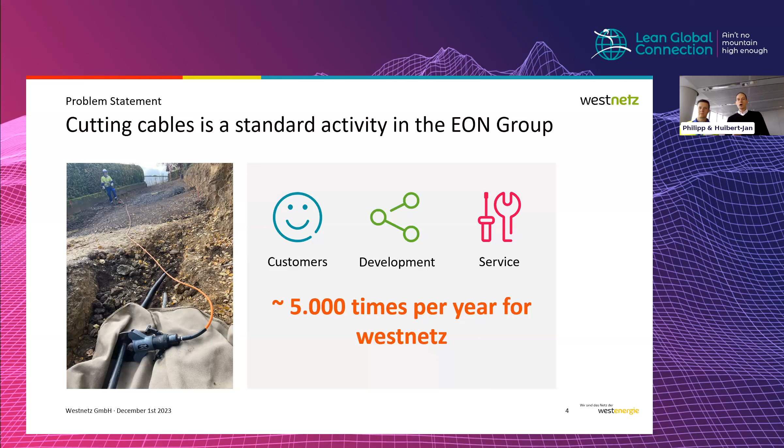So what could possibly go wrong in a situation like this? Well, first of all, if you do this wire cutting, of course, the current needs to be off of the cable. And unfortunately, what we have found is that cutting these wires and taking the cable off the grid goes wrong quite often in our case. So if you look at the 2021-2022 numbers, we had within Westnetz 13 near misses and even 3 larger injuries.

Now, how important is that? So what happens if you cut a cable which is still connected to the grid? We have a small video around that. And so please keep in mind, this is a low voltage connection that you will see in the video. So that's the same type of connection as you have at home. And let's see what happens if you cut that with the same device as you saw in the previous picture, where there is still current on it. Yeah.

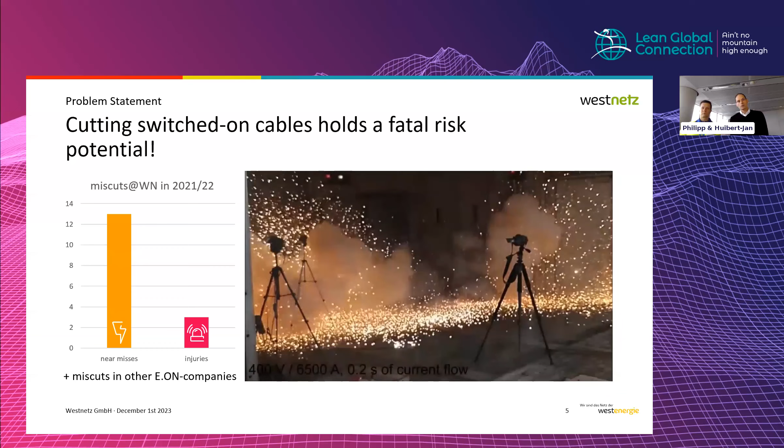Thank you. So I think you can see the massive impact of that. So this is one of our testing laboratories that we have for ourselves. There is a huge explosion. And so to explain it, so-called magma is being spread around in the environment. And the temperature is even close to 5,000 degrees Celsius sometimes. So you can see the huge impact when something happens like that.

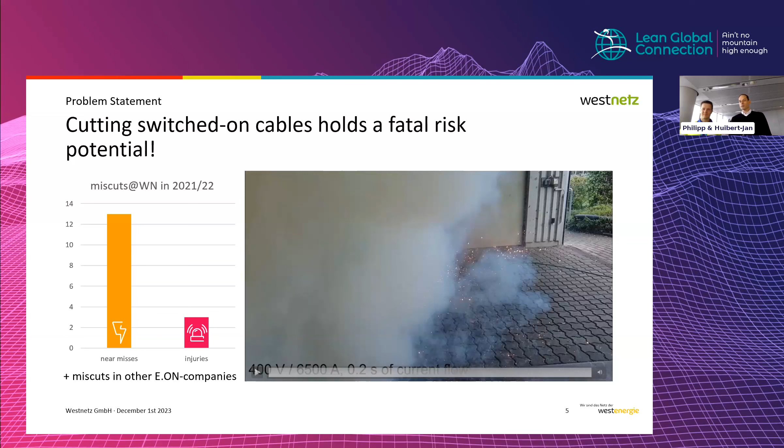So one last remark around that. This cannot happen at home for you, because there you have your own switches and your gear, so don't be afraid. But it is an actual reality for our workers in the field on a day-to-day basis. Yeah. How did we tackle this problem?

Yes. So we tackle this problem since you must imagine that sometimes the workers also have the chance to cut these cables by hand. And if they cut it by hand, it means that they are very, very close to this possible danger. That's why we have got those injuries. So we tackle the problem. And since we are good Germans, of course, we did it in a very structured way. So it's the regular PDCA circle.

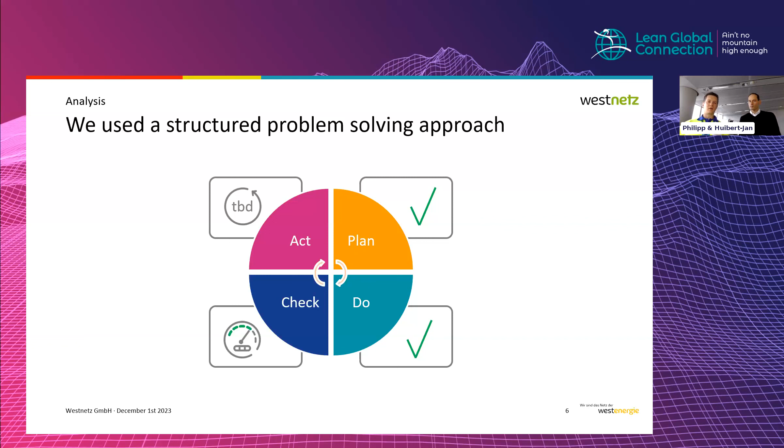At first, we discovered that there is a problem and we described it, analyzed it. Finally, we figured out some measures to avoid those injuries. And currently, we are implementing the solutions and check if it's sufficient or if we also need to react on further incidents. So since we had 16 incidents, we also have got 16 times the chance to analyze those problems. So what you can see on the left-hand side is the way that we do it.

We do it in a root cause analysis. So we see a symptom which grows up from the ground, and the symptom is a miscut. So what we do is now dig deeper and deeper until we figure out the root causes. And we have done this by talking to the people that suffered from those miscuts. And when I say that we talk to blue-collar employees, it does not mean that we go there and argue, but it means that we talk to them in a very fair way with the aim to learn from those mistakes in order to avoid them in the future.

Secondly, of course, we have got very nice PowerPoint slides that describe everything well, how it should be. But finally, reality might differ from that. So we also went outside to the construction sites and had a close look at the process itself and how cables are being cut. Finally, 16 incidents means 16 times the chance to analyze the data that we have got.

So what we have figured out, for instance, is that all injuries took place in the low voltage grid. Why? Because in medium voltage, there is a huge respect. Something really severe might happen, but low voltage, come on, it's like the voltage at home. You can maybe do it by hand. As we have seen, it can also become critical.

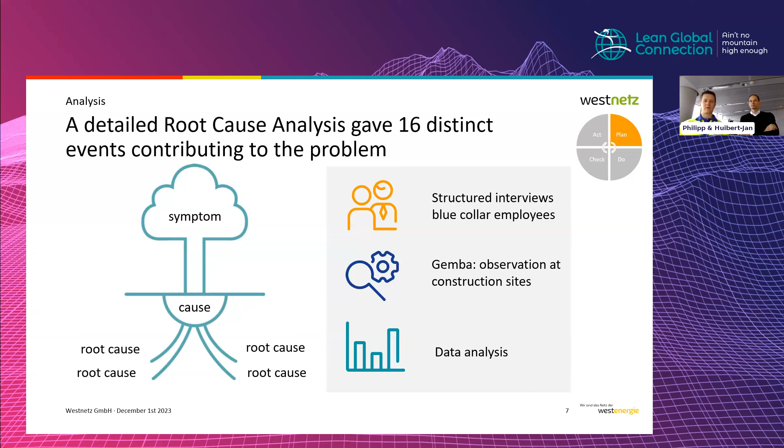So what I would like to point out at very first, and this is necessary to understand: our workers were always 100% sure to cut the right cable. None of us gets up in the morning saying, come on, let's have an incident today. So that's the very first part. Nevertheless, we have got those incidents. And we have figured out 3 main reasons for this.

So the very first necessary precondition for a miscut is that we mix up the cables. So for some reasons, workers do not work on the right cable. Maybe documentation isn't good, or the identification process failed, or we were interrupted in doing our job by somebody else.

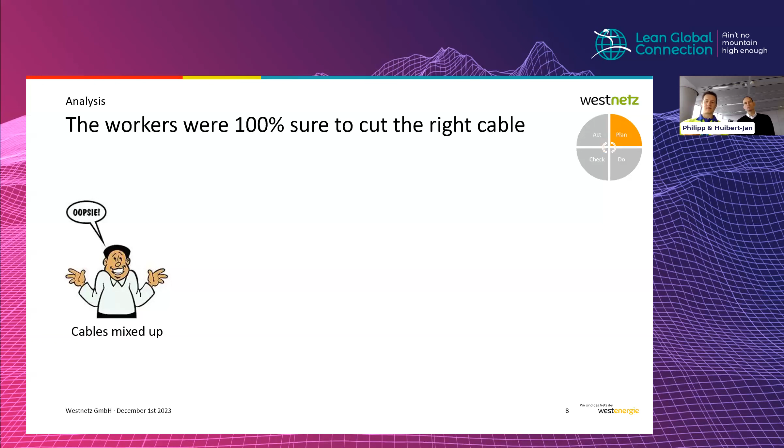Secondly, our workers stated that sometimes the instructions are too complicated. So sentences are too long, too much text, too complicated written. Sorry, we don't get it. So by these two preconditions, we have got a miscut, and danger arises if we use the wrong tools.

So as I've said, it's also possible to use hand-driven scissors, and it's of course a little bit simpler to use those compared to our old cutting tools that we have got. So our old cutting tools were way too heavy. It weighs like 20 to 25 kilograms. It's being transported in a large box, and it's not possible to always carry it with us on our buses.

So if we need to cut a cable, we have to return to the station, get the device, and return to the construction site to finally cut the cable. So it's quite a complicated process for our colleagues.

So to explain that, you had the heavy device. Exactly. And they could also do it with a smaller handheld device. Exactly. And which was kind of the quick fix, basically, what people could use in the field. Yes. Sometimes necessary, in this case, unfortunately.

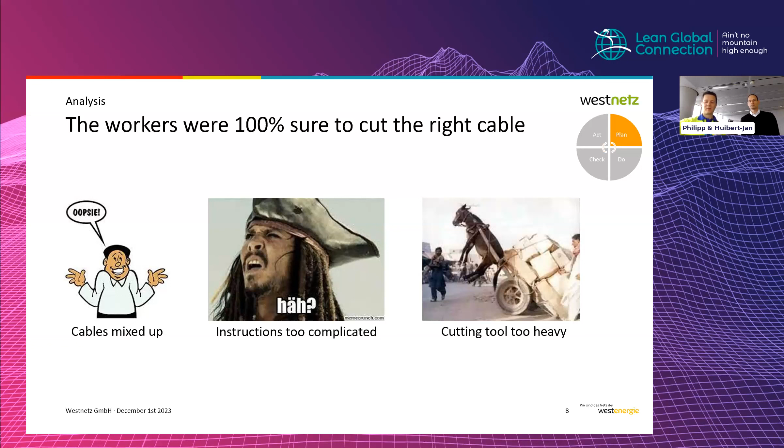So, since it's such a multi-level problem, we decided to tackle these problems also on each level according to the TOP principle. TOP principle means that we developed technical, organizational, and personal solutions in order to avoid miscuts.

So the very first technical solution is that we screened the market to find a new cutting tool. And today I brought a cutting tool, which you can see here. So you can maybe check the size of it. I can hold it easily with two hands. It's quite smaller. It's being run by a battery package.

It's only possible to run it from distance, so you cannot touch the button like a screwdriver and then the scissors run. No, we have got a separate remote control that runs the device. And together with the manufacturer, we have added certain safety measures. So finally, we have got a fully customized device for Westnetz.

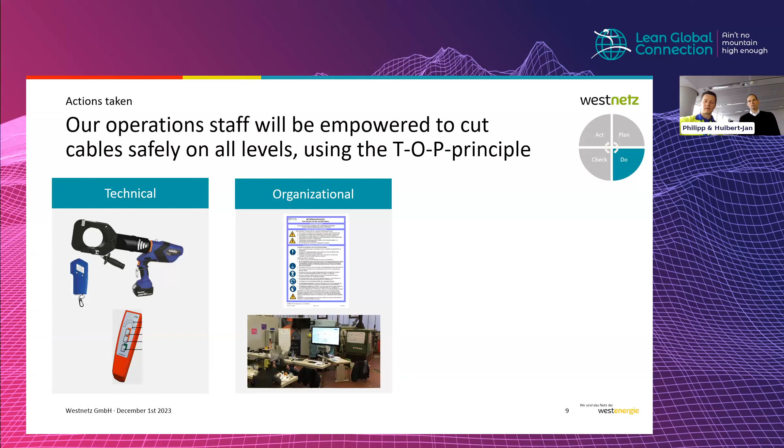Last and certainly not least, we still continue to sensitize on the danger of miscuts. So 2 weeks ago, we launched a video which shows the danger of miscuts, and you have just seen a small piece of it.

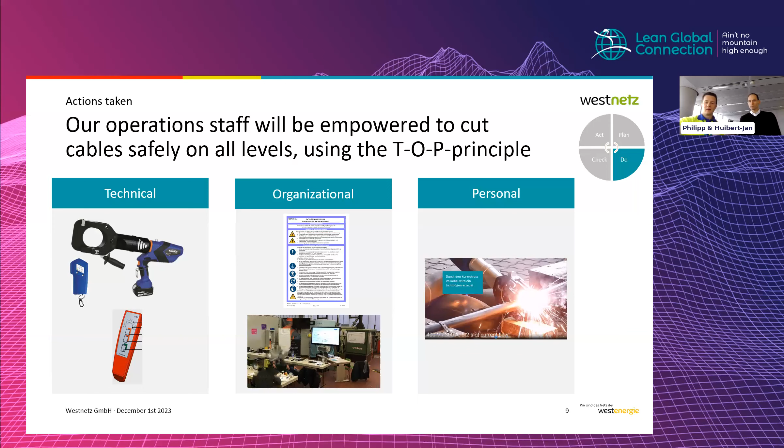Of course, all this solution is not a brilliant idea of mine. It's a solution of many, many people and colleagues in our company. So the operations staff tested the new tools and gave us important feedback for the development. I personally do not know what the exact needs of blue-collar workers are, so they have to tell.

Secondly, the instructions were revised with experts from service teams, from special departments, from HSE. And of course, also management and works council were included in the solution process, as finally, we also need some money. And we are quite happy that our professional association supports the development of our new cutting tool. So it's also some kind of legalized process.

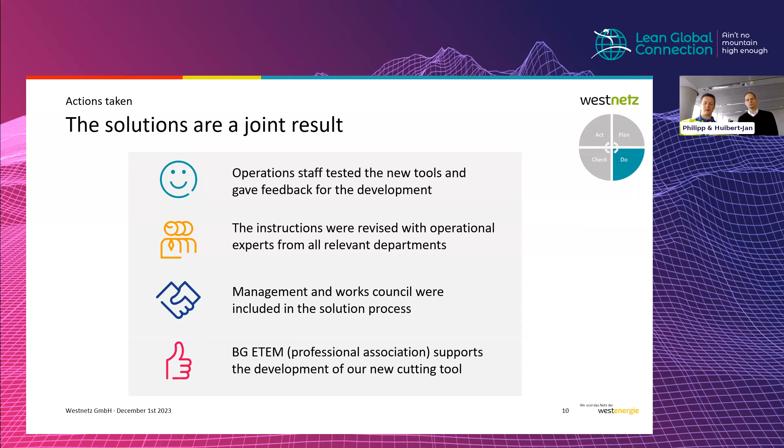Yes, finally, all our measures have been rolled out this year. So we incorporated the instructions. By now we rolled out all tools that we've developed. And we are looking forward to close the training of our staff. By now, we do evaluate our measures. We figured out some smaller parts where we can still improve, and those are measures that we're going to implement by next year.

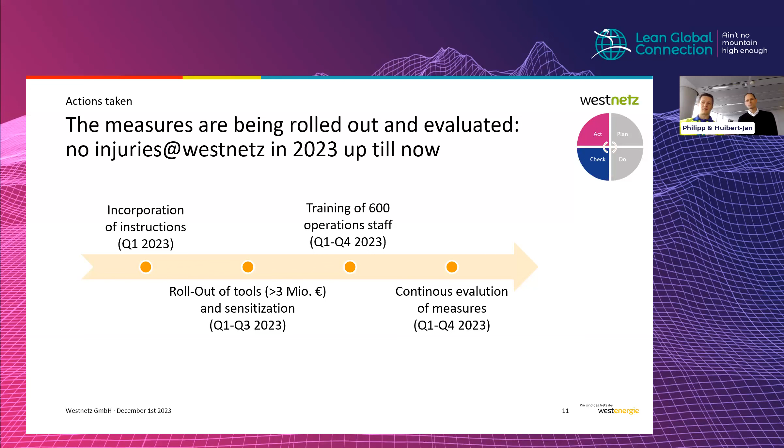Yes. And we're happy to say that we have much less incidents now. True. Yeah, so maybe you can give the latest numbers. We have got like 10 incidents, but no injury.

Super, super. Yeah, so what was the overall effect on the whole of the company? So first of all, very important is the employee engagement. So everybody in the company, also the frontline staff, feels that we care about them basically. And so we want to offer a safe working environment for everybody in the company. And we place huge emphasis on this.

So it gives a better working culture, a safe working culture, and also the employees see that the upper management is really involved in this whole initiative. So that also increases the motivation and the acceptance of all the solutions that we put forward.

Of course, the next one is that we are going down on the curve. So we have an increase in development of our HSE culture. So we are going towards now level 3 and level 4 in the different risks that we have.

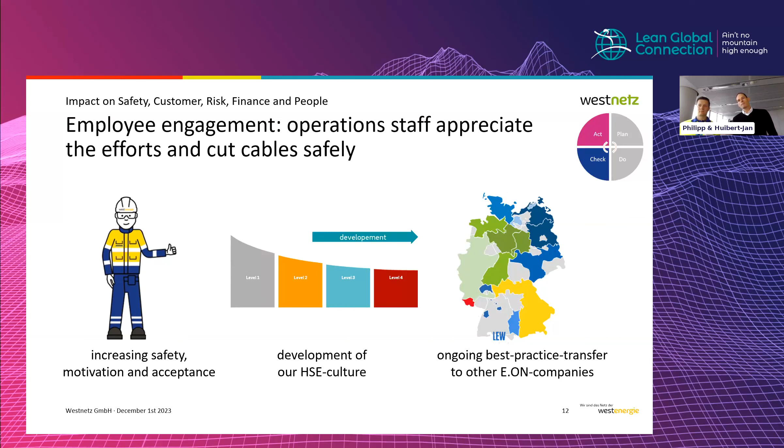And the other thing is that, so I showed you the map at the beginning of the presentation. So all the cases that we show and the solutions that we have are specifically for Westnetz. We're now replicating that solution across the whole of Germany and all the other 8 grid operating companies that we have, and there is a huge interest in there.

So if you think about Westnetz has 5,000 cuts on a yearly basis, if you multiply that, let's say by 10 or 12 for the whole of Germany, we're talking about 50,000 cuts. And think about the risk of injuries and miscuts that could happen over there, and that could really have a huge impact on our employees and even society. Yeah.

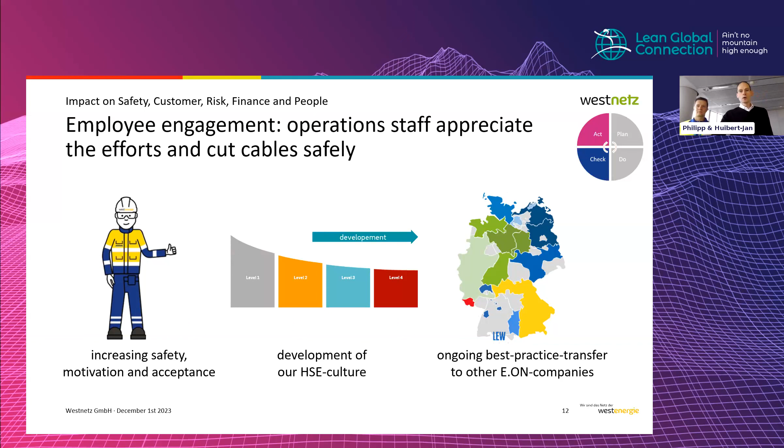Good. So finally, a call for action from our side. So let's cut our cable safely, I would say. So this is the end situation that we now have after implementing everything. We have a trained employee that knows what to do, of course, wearing the right PPE equipment.

We can identify the right cable that we need to cut because we have this new identification tool. And the tool that is used for the cutting is much more handleable by everybody. It is remote controlled, so we are creating a much better and safe working environment for everybody. Yes, and we're happy about that. So that brings us to the end of this presentation, Mieke.